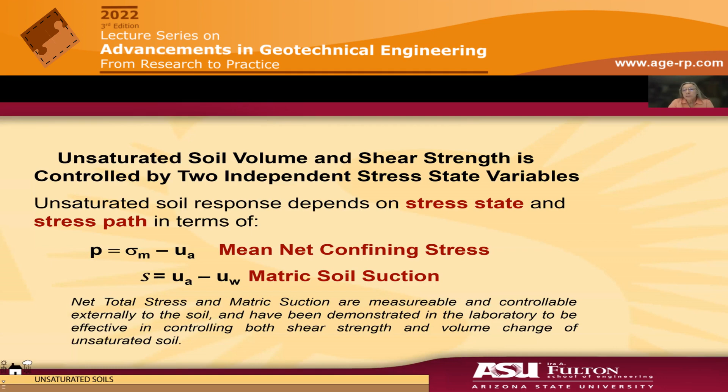As a reminder, the unsaturated soil volume change and shear strength is controlled by two independent stress state variables: the mean net confining stress, P or sigma minus UA, and the matric suction, S or UA minus UW. It's important to note we select these two variables because the net stress and the matric suction are measurable, both controllable external to the soil, and both have been demonstrated in the laboratory to be effective in controlling shear strength and volume change response.

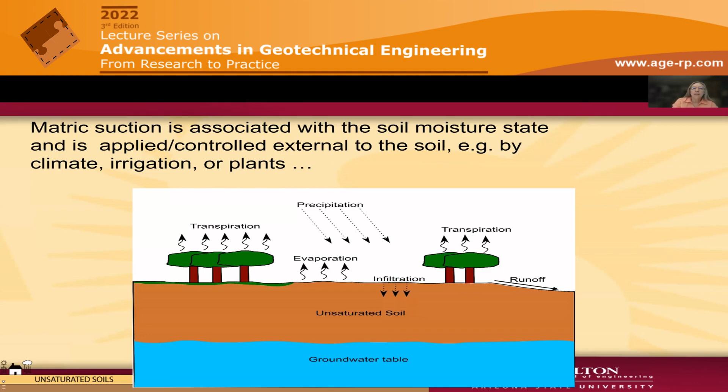The matric suction in particular is of interest. It's associated with the soil moisture state, and it is applied and controlled externally, for example by climate, irrigation, plants, groundwater table position, and so forth. But because the matric suction is related to the moisture content, the water content takes on a particular importance due to its relationship to the soil state of stress when dealing with unsaturated soils.

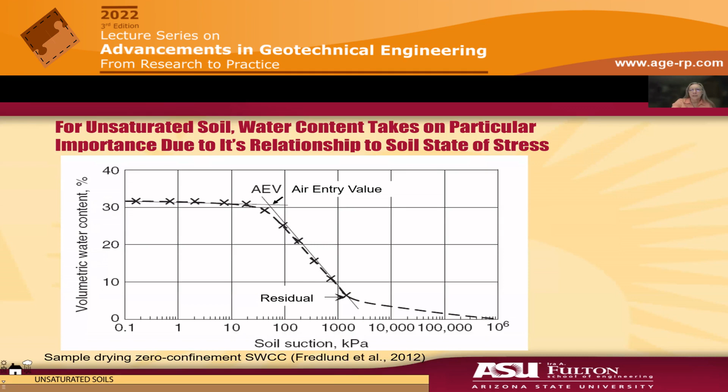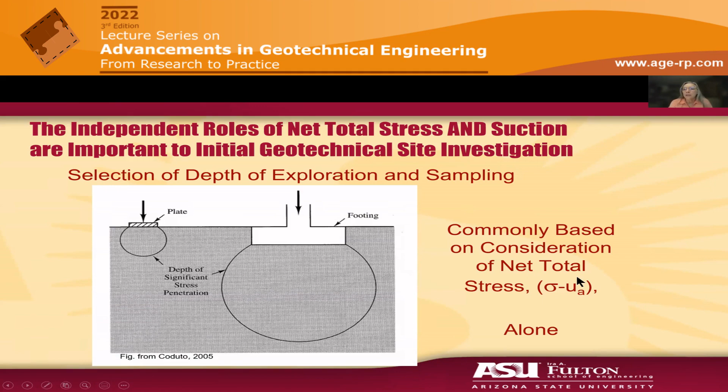Going into practice, the independent roles of the net total stress and suction are important even at the point of site investigation. For example, when we select the depth of sampling and testing, normally we are looking at the depth of exploration and sampling on the basis of stress bulbs, such as the ones shown here, which is effectively like looking at the net total stress alone.

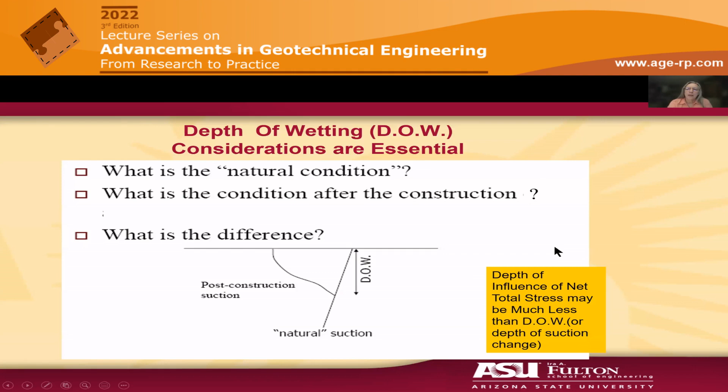However, with unsaturated soil mechanics, we also need to think about the depth of wetting. So we have to consider what is the natural state of moisture in the soil, what will be the conditions after construction, and what is the difference—the natural state compared to the post-construction state. What we find is that very frequently the depth of influence of the net total stress may be much less than the depth of wetting, or the depth over which we have changes in suction. So we have to couple these two things together to figure out what our depth of sampling and testing is going to be.

If we look at the common tests performed in practice, certain tests can be assumed to be comfortable from a routine practice perspective. For example, very commonly performed in geotechnical practice are the 1D oedometer test, the response to wetting test (ASTM D4546), saturated triaxial test, saturated direct shear test, saturated hydraulic conductivity test, and a host of index and gradation tests. These are things we can assume are not too much to ask for a practicing engineer to perform.

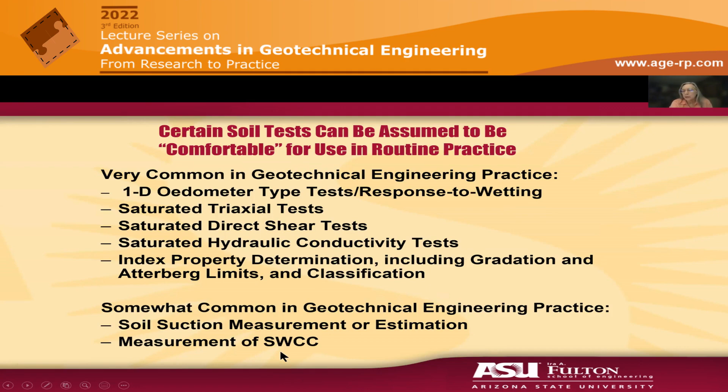More recently, what has become somewhat common in geotechnical practice is to either measure or estimate soil suction, and certainly measurement of soil water characteristic curves can be assumed. So the question arises: how are we going to use these common laboratory tests in developing procedures for dealing with certain problems in unsaturated soil mechanics practice?

Let's first take a look at how we use these common tests for unsaturated flow problems, or some might call them seepage problems.

I would also note that in general, when we're making this relationship between saturated conductivity and unsaturated conductivity, it's fairly typical that we will not take into account the volume change in making that assessment.

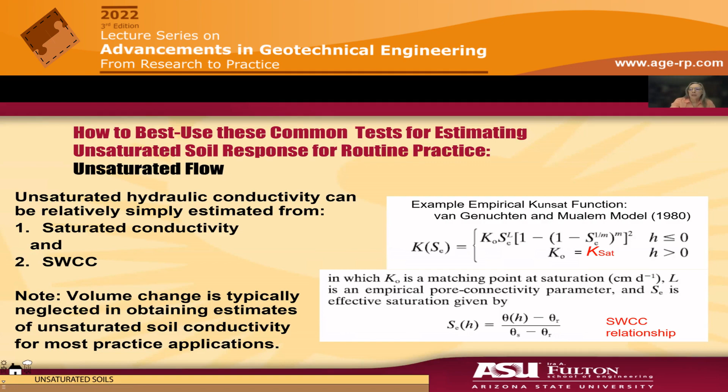Once we have the unsaturated hydraulic conductivity function, we're now going to use this in an unsaturated flow analysis. There are many computer codes available for doing such an analysis. In spite of the fact that we have some challenges in modeling relatively complex surface flux conditions, these unsaturated flow models have proven very useful in practice for looking at various what-if scenarios—what if we get ponding, or what if we plant a tree, or remove a tree?

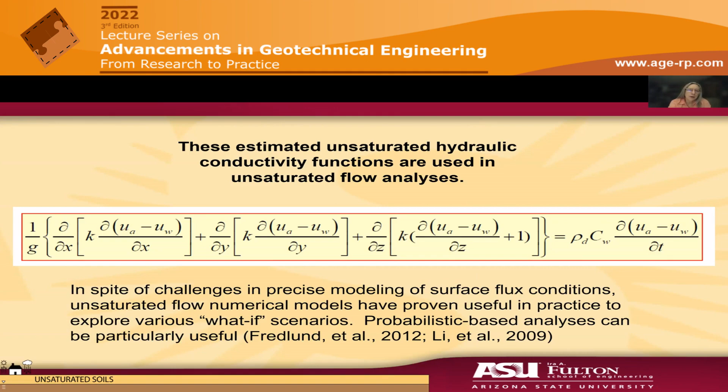Also, probabilistic-based analyses have proven very useful in practice in dealing with unsaturated flow problems. An alternative to doing an unsaturated flow analysis would be to use something like a field database for particular field conditions, and this has been empirically developed for certain limited cases.

For example, we have looked at a lot of field suction profile databases for expansive soils, and there are empirical models presented by Lytton and colleagues. In particular, we see those a lot in the post-tensioning institute methods that are widely used and published, and also in some recent studies by myself and Vann.

In this sketch, you'll see a plot of suction versus depth. These happen to be normalized for climatic change conditions, and the various climates will affect the shape that we get. The climate is judged on the basis of TMI, the Thornthwaite Moisture Index.

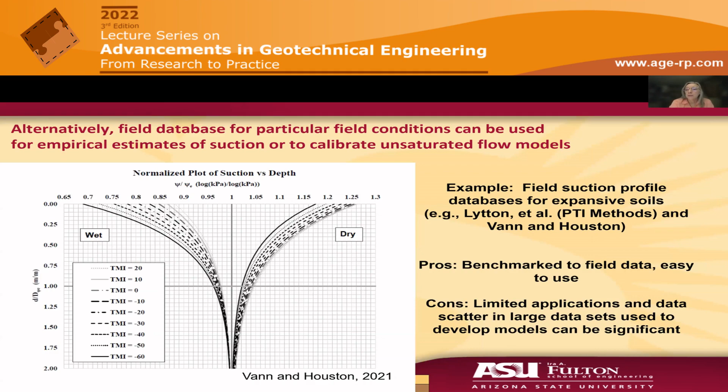These do have some benefits in that these empirical models are benchmarked to field data and they're pretty easy to use. But the con is that they have limited application. Here, for example, we're only looking at climatic change and only looking at expansive soils where there's relatively deep groundwater table. Also, the data sets we use, because they're field data, will often have a significant amount of scatter, which we have to deal with in our uncertainty.

Now, if we take a look at these unsaturated hydraulic conductivity models that we get by using the saturated conductivity and then empirically adjusting based on the SWCC, what we will find is that there are some relatively complex and highly nonlinear results that we get.

So if we look at the hydraulic conductivity, or coefficient of permeability, as a function of matric suction, if we look at the result for a fine sand, of course when we have low suction such as zero here, we know that the sand is going to have a higher hydraulic conductivity than the clay, and in fact maybe several orders of magnitude. But what we know is that as we increase the suction, our unsaturated hydraulic conductivity is going to begin to decrease.

At a certain point, when the suction gets high enough, we actually have the clay with a higher hydraulic conductivity than the sand. This makes intuiting what's going to happen in the field somewhat challenging, and we need to keep this in mind when doing unsaturated flow analyses. The unsaturated clay can carry more water than unsaturated sand or gravel. If we're not aware of this, we can make errors.

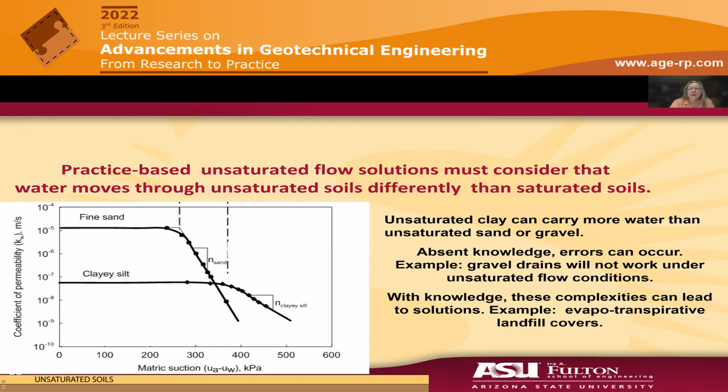So we've developed a pretty good protocol for dealing with practice-based unsaturated flow problems. It generally goes like this: one, obtain the saturated soil hydraulic conductivity and measure the SWCC. Two, use empirical correlations to obtain unsaturated soil hydraulic conductivity at various levels of suction. Then use these estimates of unsaturated conductivity and the SWCC in unsaturated flow, various what-if scenarios. This has been done for a long time. We're doing a lot more interesting applications, but the protocols are relatively straightforward.

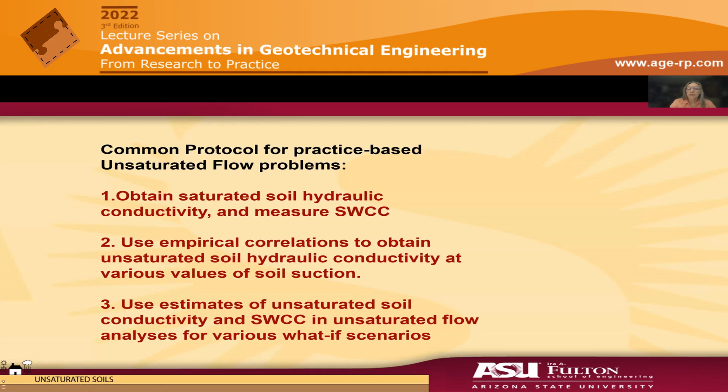Similarly, if we look at how we use common laboratory tests in dealing with practice-based shear strength problems, shear strength has been studied quite a bit, and we find that the shear strength of unsaturated soils usually increases with matric suction. If we look at the plastic clay curve, as the matric suction increases, we get an increase in shear strength. Similarly for silty soils, and eventually it levels off.

The only exception is with cohesionless sands, non-plastic materials, where when they get dry enough, their shear strength falls off. Also when they get too wet, their shear strength is going to be somewhat different than their peak - it's going to be very low. A classic example of this is the sandcastle: if the sand is too dry, you can't build anything, or if it's too wet, you can't build anything.

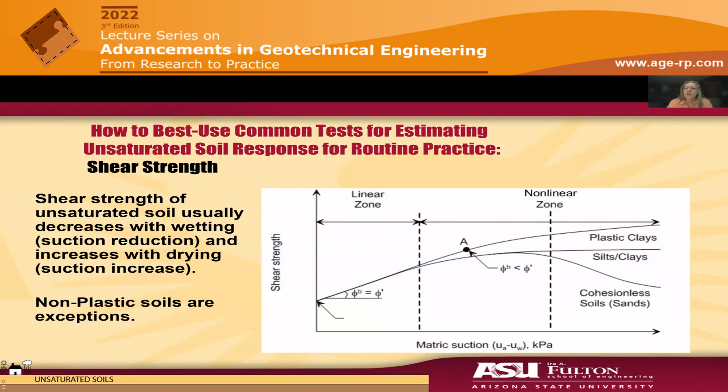But setting aside the non-plastic soils, the general response is that the shear strength of unsaturated soils will increase with increasing matric suction, which means as the soil dries, it gets stiffer and stronger. There are a lot of empirical relationships that exist for estimating unsaturated soil shear strength. I've put up here a couple that you're probably familiar with, since they've been around for perhaps the longest period of time.

Let's take a look at the Khalili equation. The shear strength is calculated from the saturated soil cohesion intercept C prime and the friction angle phi prime for saturated conditions. So we have C prime plus sigma tan phi plus a component related to the soil suction. The shear strength typically increases with increasing suction when we deal with practice-based problems.

This makes it possible to utilize empirical chi-type single stress formulations, such as the ones shown here, for many limit equilibrium practice-based applications. For most applications it's acceptable to use these empirical relationships, but note that they ignore exceptions, such as the one shown with clean non-plastic sands, where shear strength can drop off as suction is increased. Barring these exceptions, for many, many applications we can use these - you'll see them used in slope stability problems, retaining wall problems, and bearing capacity problems.

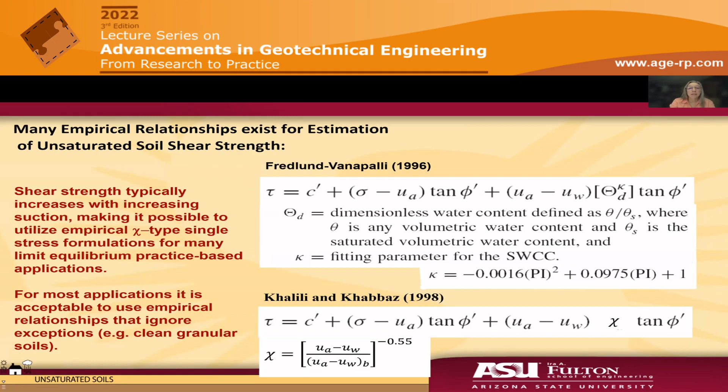So we have a fairly well-established common protocol for practice-based shear strength problems. One, obtain the saturated soil shear strength parameters, C prime and phi prime, and measure the SWCC. Two, use empirical correlations to obtain unsaturated soil shear strength at various suction values. Three, estimate soil suction values and use the estimated unsaturated soil shear strength in limit equilibrium analyses. It's a fairly simple three-step protocol, similar to the one we used for unsaturated flow: get the saturated properties, the SWCC, develop empirical correlations, and then proceed with the analysis.

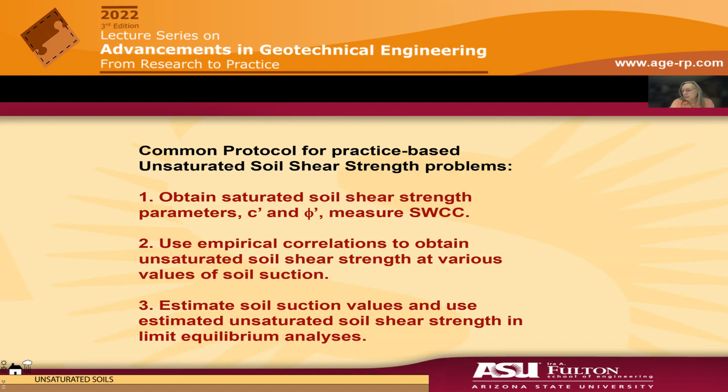Okay, now let's take a look at volume change.

How do we best use these common laboratory tests when we're dealing with unsaturated soil volume change response? As I mentioned, a common protocol for practice is to first measure saturated, then estimate the unsaturated soil properties response using empirical methods, typically based on the SWCC.

However, when it comes to volume change, this cannot work well. What we find is that volume change is the most complex, and arguably the most important unsaturated soils application. It's been known for a long time that volume change needs a different protocol than shear strength or unsaturated flow.

Fredlund and Houston in 2009 conclude in their paper that a hierarchical level of approach to unsaturated soil property assessment is desirable, taking into account situation-appropriate level of testing and analysis. For example, a different level depending upon the level of risk, or whether you're doing a preliminary design or a final design. However, separate protocols for routine practice are required for shear strength problems, fluid flow problems, and volume change problems.

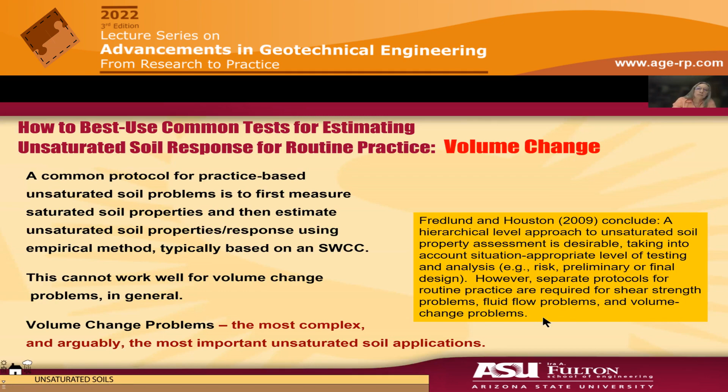So what makes volume change such a different thing, and why is it so different in development of protocols? As we have learned, it's difficult sometimes to even intuit the direction of volume change.

Is it going to be expansion or compression when the soil becomes wetted under load, unless you have laboratory test results? What we're looking at here is a depiction of the volume change in response to full wetting, that is full wetting to suction equals 0, of a particular clay soil. This clay soil has been compacted at a low density, a medium density, and a high density.

Let's take a look first at the medium density curve. If I run a response to wetting test in an oedometer device by first applying a stress level that is relatively low, such as at this point, and then I wet it fully, I'll probably expect to get a swell strain response. And in fact, I commonly do.

But if instead what I do is load the specimen to a much higher confining stress, such as this point here, now when I give the soil full access to water and let it wet completely, I will get a compressive or a collapse response. How much of a response depends on the density, but this is a very common type of scenario for any soil that has some plasticity.

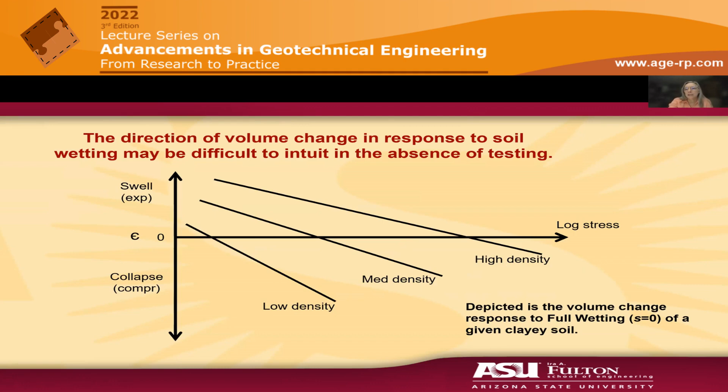So looking at it in the two stress state variable perspective now, this behavior presents itself as that warped state surface that Professor Zhang presented to you earlier, and that was first presented by Matyas and Radhakrishna in 1968.

This is a plot of our void ratio versus suction in one plane and the net normal stress. What we can see is that if we start here at point A at some value of suction and a confining stress level P that is relatively low, when I decrease the suction, I will get expansion, A to A prime. On the other hand, if I start here at a high stress level and I wet the specimen, then what I will see is that as I decrease the suction, I can actually get a collapse or a compression response. This gives us the warping of that state surface that we have to deal with.

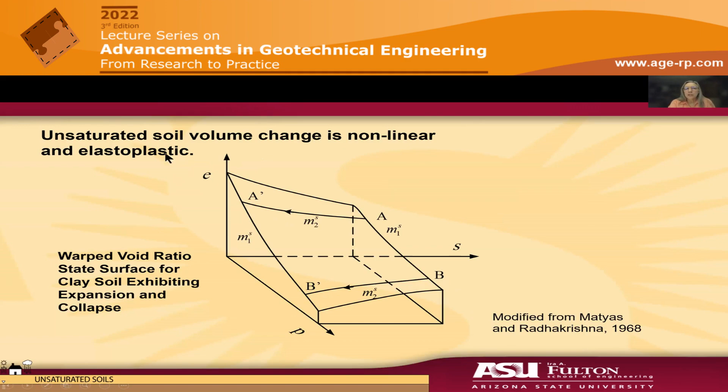So the unsaturated soil volume change is nonlinear. The other thing that we know is that the unsaturated soil volume change response is elastoplastic and stress path dependent. We see this very clearly in the modified state surface approach that we learned about in the previous lecture.

What you see here is a depiction of the elastoplastic unsaturated soil response to changes in net stress and changes in suction. We have a unique virgin loading surface as depicted here, and then we have a downward movement of the elastic surface as yield occurs. So for example, what we get is some path dependency.

If we start here at D in the elastic surface and we load to E, we can unload elastically and come back to D. But if we increase at constant suction by increasing P, we will end up here, say for example at point V. Now, if we unload, we're going to unload along an elastic surface which is now lower. So our first elastic surface was AGHB, but now that we've loaded to V, our new elastic surface is A prime, G prime, U, and W.

When we load from V to, for example, unload completely to 0P, we'll end up at a point D prime. The main point of this is that we have elastoplastic response and stress path dependency. It's very clear to see from the MSSA view.

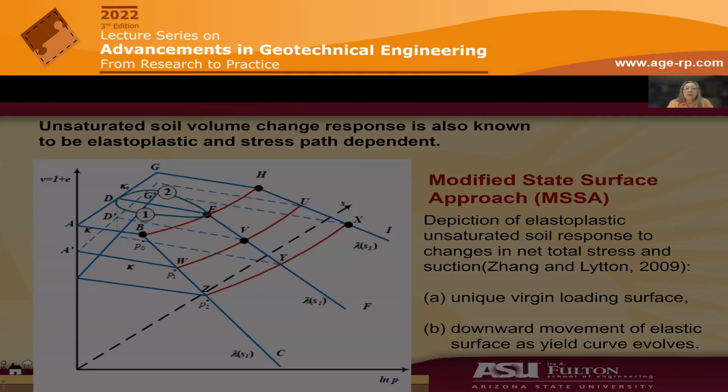The complexity of unsaturated soil response is a lot like trying to analyze these blindfolded men trying to analyze this elephant. Each blindfolded man, in his own opinion, exceedingly stiff and strong, though each was partly in the right and all were in the wrong. For example, if you're looking only at the ear, you may think this is a fan. Or if you're looking at the tusk, oh no, it's a spear. At the tail, it's a rope. Or the leg, it's a tree, and so on.

If you look at only a piece of the picture, you can get a very wrong view of what things actually are. Analogously, a fundamentally sound unsaturated soils theory must hold a holistic view of the unsaturated soil volume change response, particularly given the complexity of response we have to deal with. Conversely, using an incremental approach, analogous to incremental plasticity, perhaps writing an equation only for the wall, may result in part of the model being correct but not applicable to other parts of the problem.

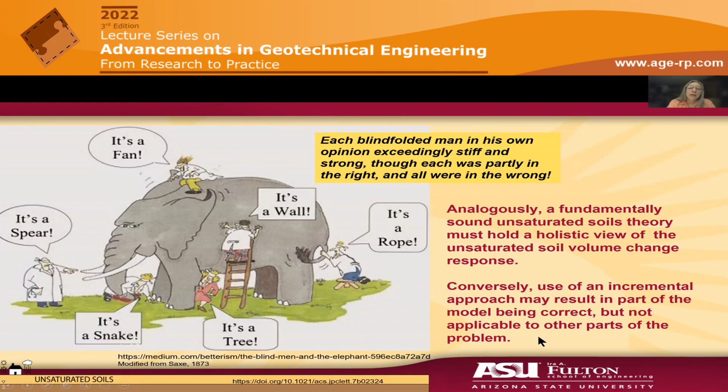So I'll postulate that we have the equivalent of an unsaturated soil elephant that is highly complex, nonlinear, elastoplastic, and path dependent. The MSSA that we talked about in the previous lecture provides a much needed guide for evaluation of volume change models and also in the development of practice-based protocols. We need to ensure that our simplified models fit appropriately within the big framework. The MSSA is a new framework for constitutive modeling.

It extends the state surface approach presented by Fredlund and Rahardjo in '93 into the elastoplasticity realm. It recognizes the complexity of the soil response, here talking about volume change response, avoids traditional incremental approaches which are fraught with challenges due to this complex behavior, and ensures compatibility between the model and the response by matching observed behavior. Also, as we know from the previous lecture, the MSSA can accommodate both expansion or collapse, so the same model can be used for both.

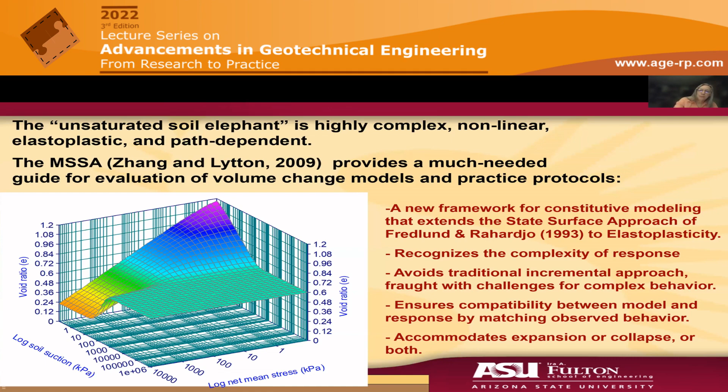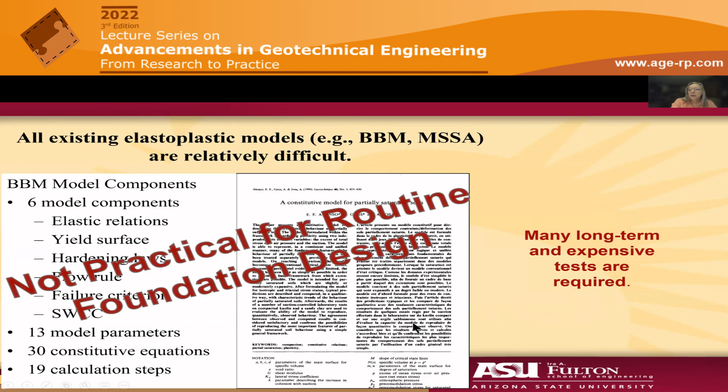We already know that elastoplastic models, such as the BBM and even the MSSA, are relatively difficult to use on a routine basis for low-cost types of foundation systems and so forth. There are many long and expensive tests required, and the analyses can become rather cumbersome. So in practice, we don't always want to do that. But the question arises: how do we deal with such complex behavior in routine practice?

Although the MSSA is very multifaceted, you can't use the whole thing in routine practice. It does provide a sound framework for an appropriate guide to evaluation of more simplified models and approaches. Also, the overall complexity, including the path dependency in particular of the soil response, points to the desirability of using a stress path-based approach.

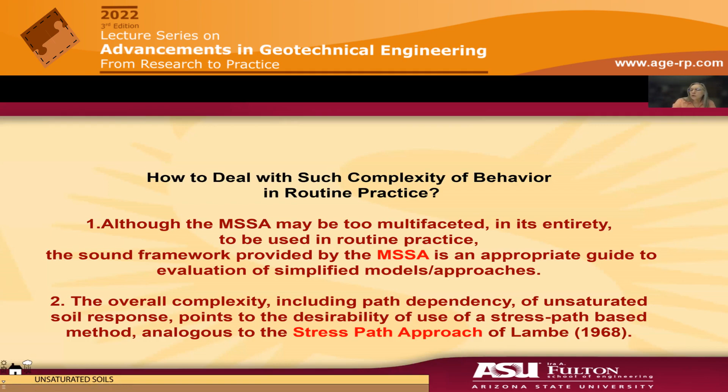This stress path-based approach was actually presented in 1968 by Lambe, and we're going to use this concept here for looking at unsaturated soil volume change response as well. If you're unfamiliar with the stress path paper and approach, basically here it is: it recognizes that you have highly nonlinear stress-strain response of soils to loading. The soil response and parameters are obtained from laboratory data that follows as closely as possible the stress path expected to occur in the field.

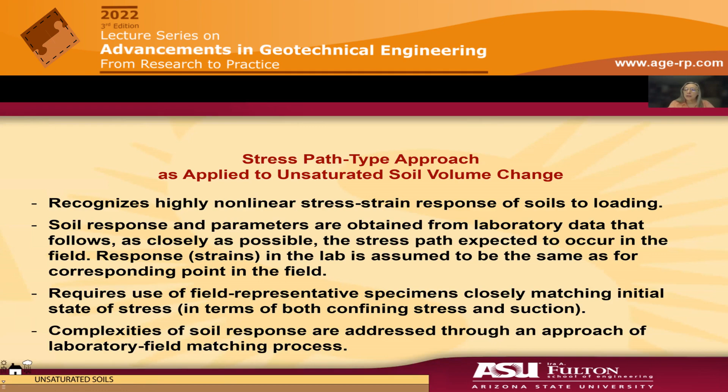The response or strains that you get in the lab are assumed to be the same as those corresponding to the point in the field, the reason being that you have matched the conditions and the stress path as closely as possible between lab and field. This requires use of field representative specimens, so undisturbed specimens or compacted like your compaction specifications, closely matching both the initial stress state, and when it comes to unsaturated soils, we have to match the stress state in terms of both confining stress P and soil suction S, so that our initial state is matched. Thereby the complexities of the soil response are addressed through an approach of laboratory to field matching process. That's the stress path approach in a nutshell.

I'm going to share with you an example of a simplified practice-based approach. It happens to be an oedometer 1D K0 type volume change problem with monotonic wetting under constant load. The good news is that even though this is a relatively simple boundary condition, it's applicable to many practice-based problems we deal with in geotechnical engineering.

The method is referred to as the surrogate path method, SPM, first developed in the dissertation work of Sonal Singhal in 2010, one of my students at ASU. It was presented at the Pan Am conference by Houston in 2018, and then in Houston and Zhang 2021, we began to look at this particular method in terms of the MSSA.

So the SPM remains as true as possible to the modified state surface framework of unsaturated soil elastoplastic response, but it limits itself to the use of routine oedometer test results in the absence of suction measurement. And it takes advantage of the stress path type approach to solution.

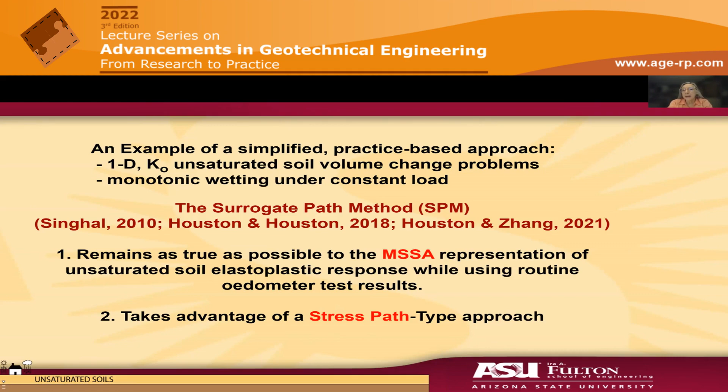The surrogate path method is for estimating partial wetting, expansion, or collapse. It can be used for either expansion or collapse, and you do not have to assume full wetting. You can have wetting to suction values that are less than full wetting in the field, which in fact is the most common scenario. It uses simple and inexpensive testing requirements.

The one we use the most is the response to wetting oedometer test with no suction control. This is the ASTM D4546 method A or B and C, if you're familiar with that specification. You do this on each representative soil layer in the field. It does require, as all unsaturated soil analyses do, estimates or measurements of initial and final suction values in order to be used.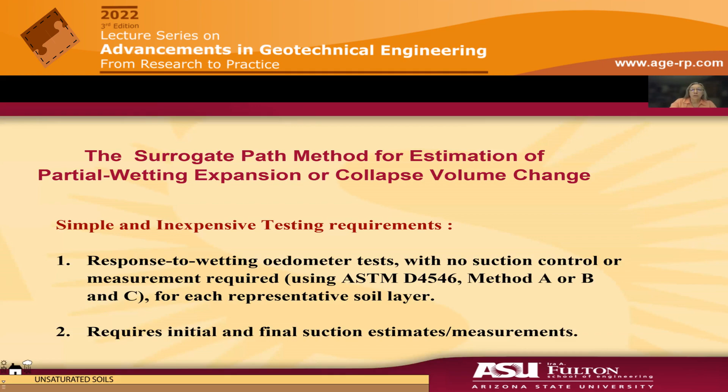So basically what it is, you take the stress path that is observed in the field, and then we're going to map that into the zero suction plane. Let me walk you through this a little bit.

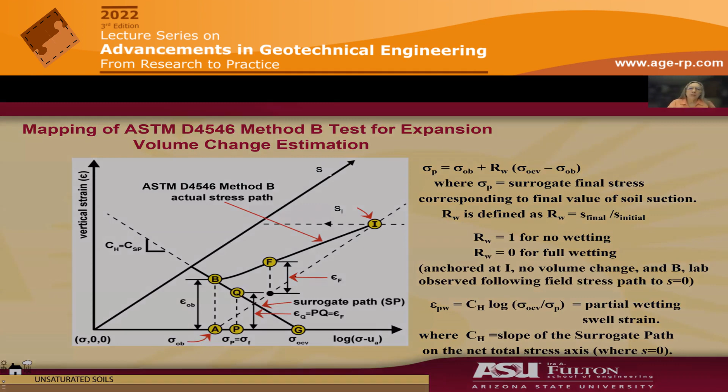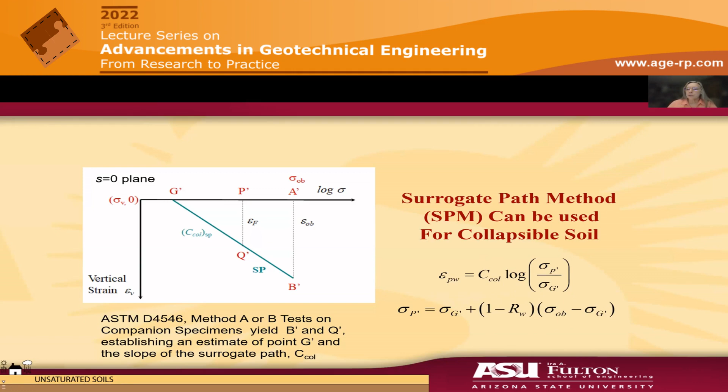Okay. Let's take a look at the SPM, looking at the MSSA perspective, because it'll be helpful in assessing how accurate we might expect our results to be.

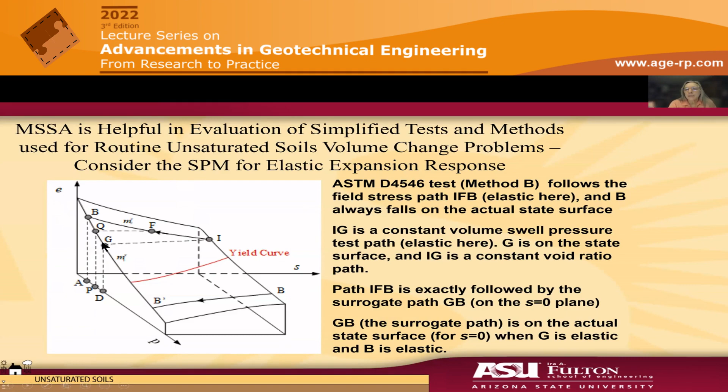Now, let's take a look at what we can say if we have some elastoplastic response, because in general, when we do the D4546 test, we really don't know whether or not our observed response was elastic or elastoplastic. So here's an opportunity to look at what happens if in fact we have some elastoplastic response.

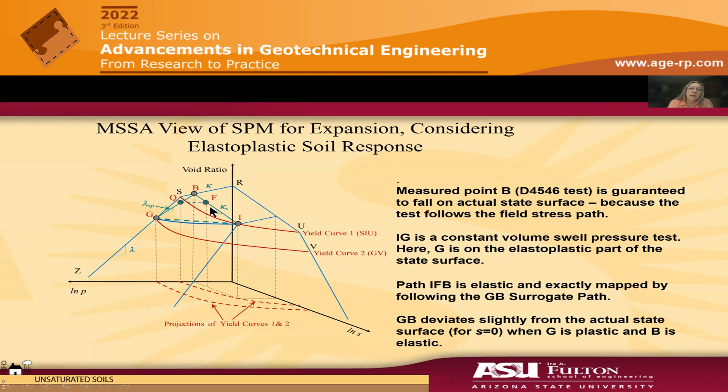It's an elastic path, but our constant volume path is constant void ratio while wetting, and it ends up on the elastoplastic surface. So path IFB is elastic, and in spite of G being on the elastoplastic surface, GB is exactly going to match IB. But notice that now GB is slightly different than the state surface. It's not going to match it exactly because we had some elastoplastic response. It is indeed a surrogate path, and that surrogate path is not precisely the state surface when we have elastoplastic response, but it does in fact precisely give us the actual stress path IFB.

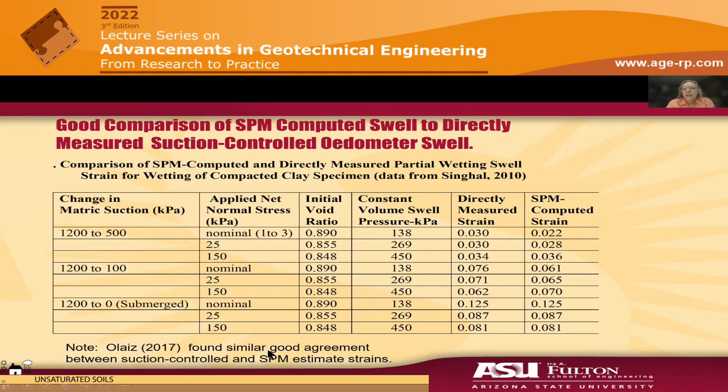A similar result of good agreement between directly measured and computed strains was found by Olaiz in some work done by him in 2017. All right, what does it look like if we look at the MSSA for a collapse response?

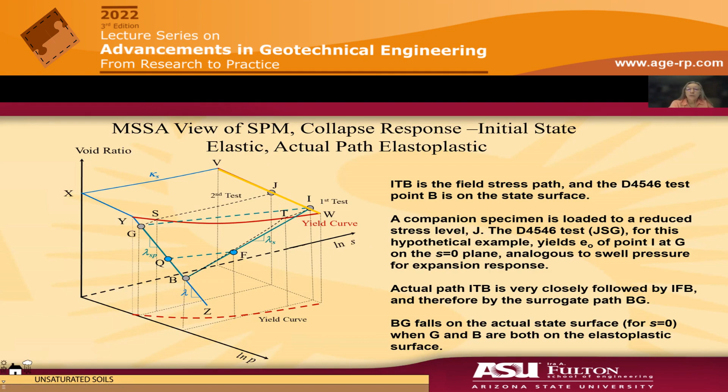So BG falls on the actual state surface. Why? Because in this case, both G and B were on the elastoplastic surface, meaning our two test specimens both created an elastoplastic response when we wetted them fully to zero suction.

Now, we can also use the MSSA to compare the SPM method to some other fairly common methods. The surrogate path method is somewhat unique in that the solution is anchored at point I and also anchored at point B. And remember, the actual field stress path is followed in going from I to B.

So when we use the surrogate path method, the slope on the zero suction plane that we're going to use to make our computations is G to B. Now, this gives us a very accurate match to the actual field stress path. And remember, B is, we're assuming, the field response.

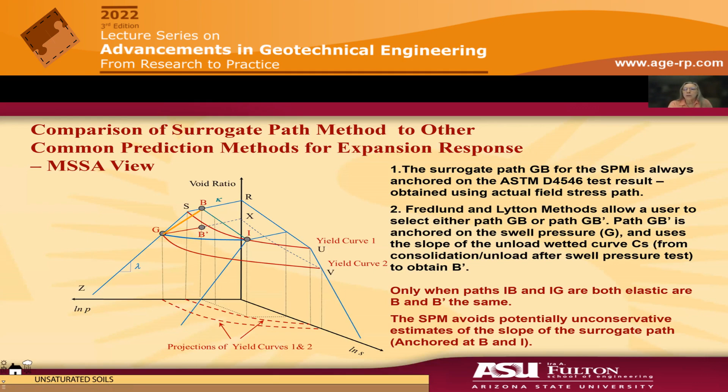Factors affecting swell test results include water content, degree of saturation, density, stress path, wetting sequence, method of testing, and I would emphasize including time allowed for equilibration. There's a very good article presented by Kumar et al. in 2020 that summarizes these effects.

It's quite possible, and in fact useful, to use the MSSA to evaluate these very common oedometer laboratory test results with an eye towards which laboratory test results might give us the most meaningful results for our practice-based application. So the ones that are really common, at least in the United States, and in some other parts of the world as well.

We're going to look at the ASTM D4546 test result, which is the oedometer test response to full wetting for either collapse or expansion. Methods B and A give us the volume change potential or the multiple specimen swell pressure. Method C is the load back, where we let the specimens swell and then load it back to get an estimate of the swell pressure.

Another test that is fairly common is the constant volume swell pressure test. Although there used to be an ASTM standard, this is not used anymore, but the constant volume swell pressure test is still used.

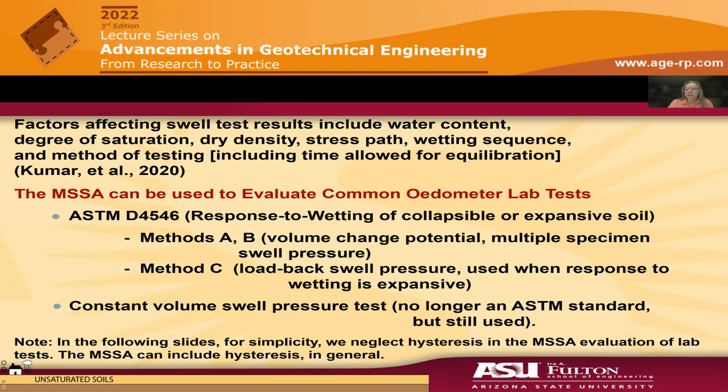What we're going to do is use the MSSA, but I just want to point out that in our initial look at the problem, we're going to, for simplicity, neglect hysteresis. We could include it if we wanted to, but we're going to set hysteresis aside in making these comparisons for now.

First, we'll look at the method A and method B ASTM methods for swell potential, followed by method C load back. Here, what I'm going to assume is that the specimen, or the element of soil as it sits in the field, was at point I. Once we get an undisturbed sample, we're sitting back at point A on the zero P plane. So we start at point A, we follow a constant water content loading to point I, and we assume we have corrected for as much sample disturbance as we can by that reloading process.

I'm not going to get into the details here, but we have found that unsaturated soils are not as sensitive to the sampling process, for example, as soft saturated clays. But anyway, we go from A, constant water content, come back to the overburden stress at point I. Once we're at point I, we follow the wetting path under constant P, from I to B, and that gives us our swell potential.

Once we have completed our swell potential test, we're now going to perform method C, which is the load back test. We go from B in the zero suction plane to S, that'll be an elastic process, and then from S to G, and in this hypothetical example, that'll give us an elastoplastic response. G then is our load back swell pressure.

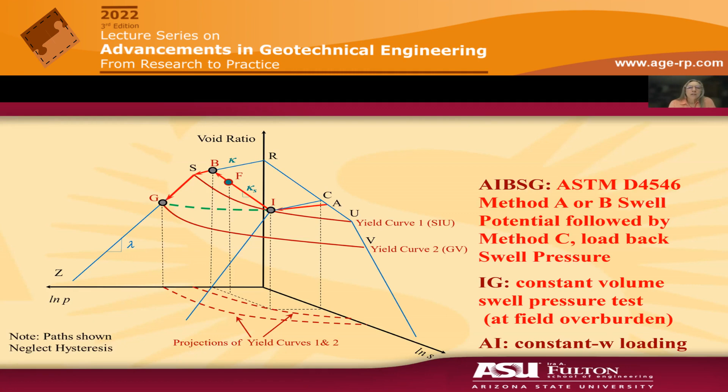And I know many of you are thinking those don't always give us the same result. And that is true. My finding on this is, in my opinion to date, that a lot of this has to do with the equilibration process and how long we're willing to wait, for example, on the constant volume swell pressure test and also on the swell potential test. There has been some very excellent work done lately - I'm sorry I didn't include the references, but you will find them in the Kumar paper that I referenced - that shows those two points begin to come together from the load back and the constant volume swell pressure test as we allow more time for the equilibration process to occur. And again, here we're neglecting any hysteresis type effects. So that is the ASTM method A, B, or C.

Now we're going to take a look at another test that is allowed for in the ASTM method, but is very commonly performed, which is the token load swell pressure test, and also the token load swell potential test. Again, our specimen is point I. We're going to start at point A, which is our undisturbed specimen in the field.

Now we're going to apply a token load, a very small load, maybe 5, 10 kPa some people try to use. You have to use dead weights to hold that practically. Anyway, we're out at A, token load.

We're going to wet to point R. Then we're going to load under saturated state to point B, and then to S. And then we're going to stop when we get to the void ratio corresponding to our field specimen at point A as it was unloaded when we sampled it. So that's the token load swell pressure test.

Alternatively, we could have done the constant volume token swell pressure test or the unconstrained test and followed a constant void ratio path from A over to J. Now, again, notice that the load back gives us the same as the constant volume if we wait long enough, but you'll notice that J is not at the same stress level as G, and so the swell pressure at J is not the same as the swell pressure at G, and we should not expect those two to be the same in general.

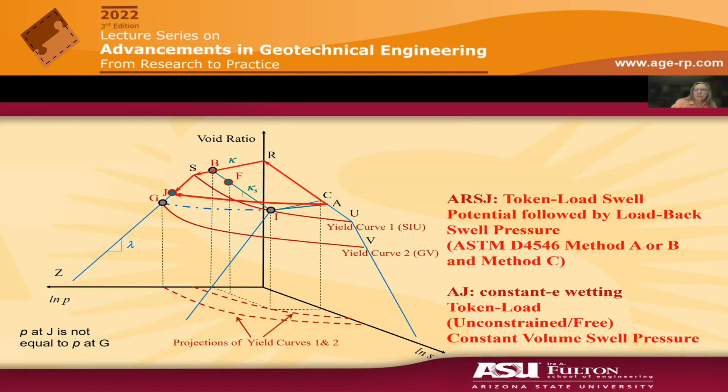And then another test commonly done is the multiple specimen test. This will be the last one that we look at, but it is very commonly used, especially for compacted fills. So what we do is we perform method A if we have compacted soil, B if we have natural soils, and we do this on companion specimens.

So again, let's say that we're interested at an element of soil at point I. We start at point A, which is our undisturbed specimen. Now what we're going to do is we're going to load back to point I, and then we're going to follow the field stress path I to B to get our swell potential at point B upon full wetting. So this is our swell potential once we give it, take it to zero suction at overburden stress.

Then we're going to take a companion specimen as close as possible to what we had for our first test, corresponding to point A. And now what we're going to do is we're going to load it to a higher stress level, a stress level higher than we had at point I, a p-value, in fact, corresponding in this case to what I'll show here is point X.

Once we reach a p-value at point X, you'll notice that what happened is in going from I to X along this constant water content path, we actually yielded the specimen. So X is on a different yield curve than I. We wet it and we actually unload here along a new elastic surface, which is below the one that we had when we unloaded at point I, and that will give us point D.

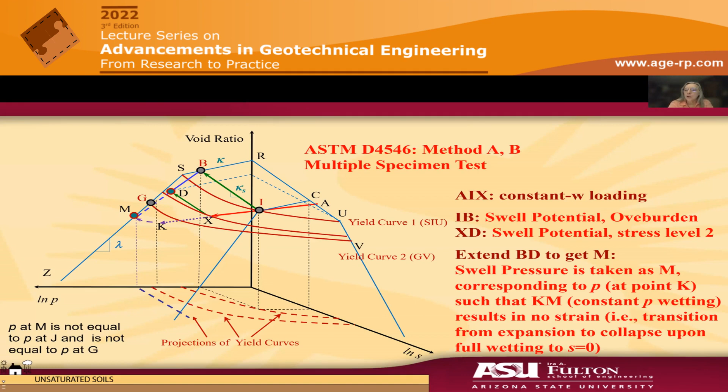Now you then might argue, well, which is the right answer? We could postulate that most of us would probably select G, but they're different. We shouldn't expect them to be the same when we do the test, following different paths and using different methods.

Okay, so let's conclude what we found here. One, different unsaturated soil protocols are definitely required for volume change applications compared to fluid flow and shear strength problems. Shear strength is typically something that increases when we increase suction, and this makes it possible for us to use empirical chi-type single stress formulations for limit equilibrium practice-based problems.

This is because the volume change is secondary for these limit equilibrium type analyses. And also because we can get away with assuming that the shear strength is going to increase with suction, because so often for interesting applications, it does.

However, a chi-type single stress approach is not possible for volume change problems because any soil with some plasticity can expand or collapse upon wetting, depending upon the confining stress that we have at the time. And indeed, it's a very common field scenario where we can get expansion or collapse even within the same soil profile.

Also, we see that the MSSA provides the big picture framework for judging simplified models, tests, analyses, and protocols with regard to how well they might model the field actual stress path. And we have found that a stress path approach to unsaturated soil volume change problems ensures an appropriate model for the region of interest of our unsaturated soil element that we're dealing with in the field at the time.

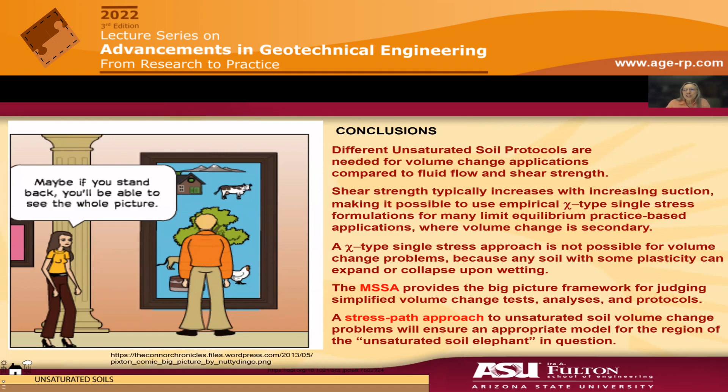Yes, this is true. And in fact, if you're going to consider volume change in your unsaturated flow analyses, which I might argue you should do, or if volume change is not secondary, then you certainly do need to couple, and you will have path dependencies for sure.

However, what we have found is that in many applications, we've been able to get away with using our unsaturated flow properties as if they are not volume change sensitive. Now, we might have used a volume change corrected soil water characteristic curve, and we may have done our saturated conductivity test at the stress levels and for the particular fabric and conditions that we have in the field.

But short of that, we normally then assume when we do unsaturated flow that those things are staying relatively stable. If that's not true, for example, if you're modeling a peat soil or something like a high volume change scenario, then you can't get away with that. But in many applications, that's what we do. So that's why these protocols, these simple protocols, have been developed.

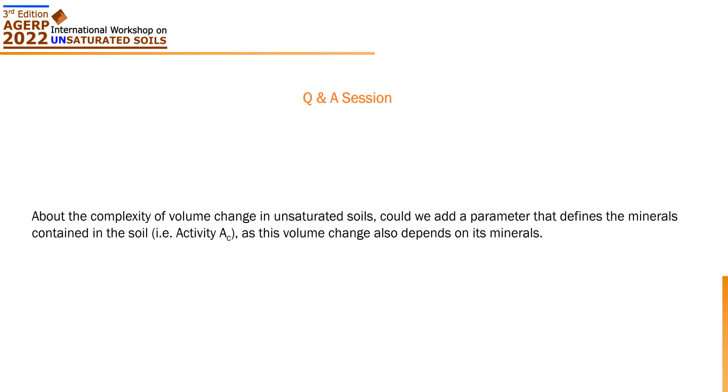The answer is you could, but I think for practice that this is not practical. I think when we're dealing, and I'm trying to focus on what might we do when we're dealing with practical problems, the best thing I think there is to try and obtain specimens that are going to match not only P and S, but are going to have the same structure as you have in the field. They're going to have the same composition, the same fabric, the same structure, and then observe on a macroscopic level what's going to happen.

Now, in research, of course, you can do other things. You can be more complicated, but in practice, we really need to be looking at some simpler approaches and trying to just again, it's the concept of this path appropriate solution, starting with specimens that are as close as possible as you can get to your field condition, and that would be my recommendation for practice, not so much for research.